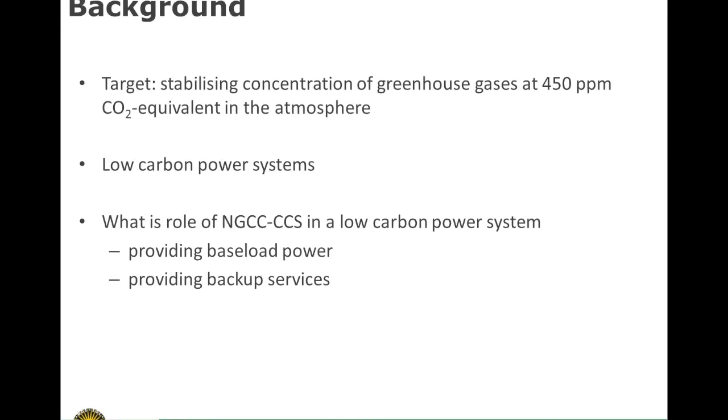We also wanted to know this for gas CCS, especially because gas CCS can play two types of roles. Namely, it can function as a baseload power plant, but it could also provide backup services for renewable energy sources. So our research question was looking at the cost effectiveness of gas CCS in these two types of roles.

In the baseload role, it could compete with different technologies, a wide range ranging from biomass or coal with CCS, geothermal energy. In this research, we focused on intermittent renewable energy sources, which I call IRES in the presentation, because this comparison has not been done a lot. We focus on three IRES technologies: offshore wind, concentrated solar power, and photovoltaic systems.

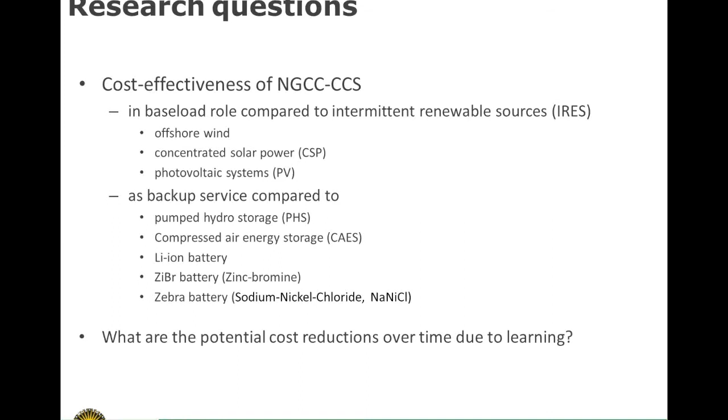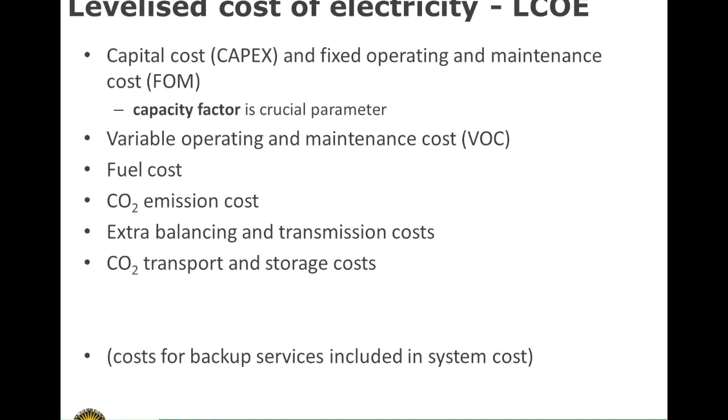We compared levelized cost of electricity, the LCOE, and these are the typical cost components in the LCOE. The contribution of capital cost and fixed operating and maintenance cost depend very much on the capacity factor, how much the technology is used in a year. And then you have the variable operating and maintenance cost, fuel cost, CO2 emission cost, and the extra balancing and transmission cost. And for the CCS, you would also need to include CO2 transport and storage cost. The costs for backup services were included in the system cost analysis. I get back to this.

I first present you our inventory of data. We did a literature review of this data and also contacted different experts. And of course, you find whole ranges of each techno-economic parameter. And we chose some median values to present the base results. These median values were either averages of the input data or could be considered as most representative. We also show results for the whole range between optimistic and pessimistic values. And also note that specific values may be lower or higher in particular regions in Europe. For example, the capacity factor of PV is higher in Spain than in North Europe.

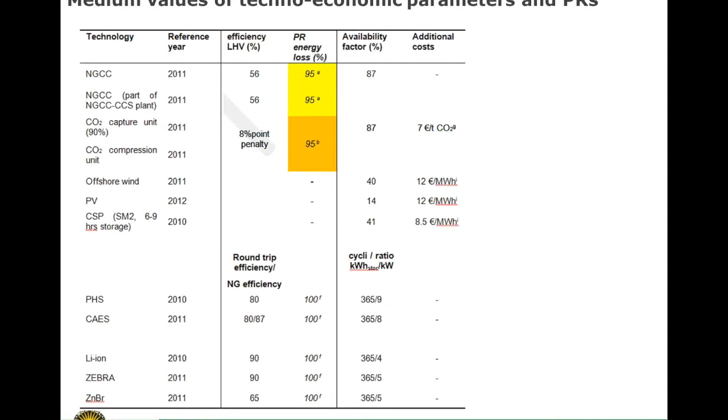These are the other parameters which are important. Of course, the efficiency is of importance, and also for this we have some progress ratio, so that the efficiency can improve over time. Availability factor is an important parameter, the maximum availability of the technology in a year. For gas-fired power plants, we found 87%, so we took this as the base load capacity factor for gas-fired power plants. For the storage technologies, it's important, to find their cost, to assess how much they are used, and for a typical storage technology to provide backup services, it would be around once every day, and then 9 hours discharging.

So with these first data I can present LCOE for 2011 and the different cost components. On the left-hand side you find the power generation technologies, and on the right-hand side the backup technologies. The power generation technologies are also split in base load, the gas CCS plants, and in IRES, which provide intermittent electricity. Gas is of course mainly dependent on the fuel price, which is in this case 7 euros per gigajoule, and the IRES depends mainly on the investment cost and fixed operating and maintenance cost. Their costs are higher, and their uncertainty ranges are also much larger than for the gas-fired ones. This is not only the uncertainty, but also the geographical differentiation.

On the right-hand side you can find the backup technologies, and as a comparison we have gas CCS with a capacity factor of 40%. Pumped hydro storage and compressed air are a bit cheaper, and the batteries are much more expensive and have a huge uncertainty range. Note that in these backup or storage technologies, the cost to charge the storage systems is not included.

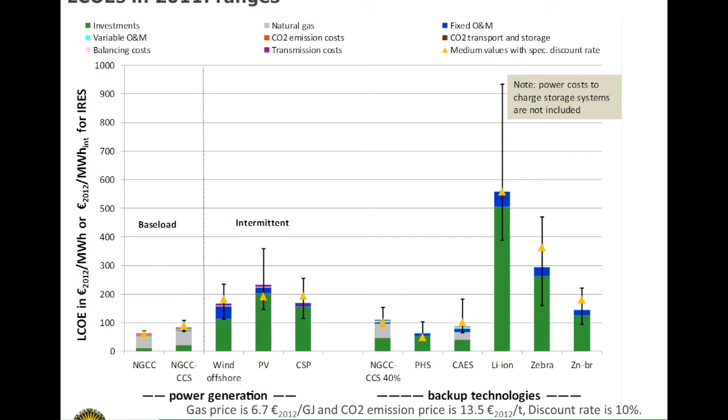Then to assess the maximum reduction, we looked at a few scenarios, and we wanted to look specifically at scenarios in which there was a portfolio to reach the 450 target, so low carbon electricity portfolios. We found 44 scenarios in the Global Energy Assessment Report and 1 scenario in the Energy Technology Perspectives Report of the International Energy Agency. We present the results for 3 scenarios, a bit the extremes: a scenario with a lot of IRES, 1 scenario with a lot of gas CCS, and then a base scenario which is a bit in the middle.

The portfolios, they look like this. Here in the left upper corner is the high renewable scenario, and in this case, the amount of doublings of, for example, PV is 7 times up to year 2050, while in here is the high gas scenario. In this scenario, the amount of doublings of PV is only 3 times.

And here in the left down corner, there's the base scenario. The gas CCS amount of doublings range from 5 doublings up till 2050 to 7 doublings in this high gas CCS scenario.

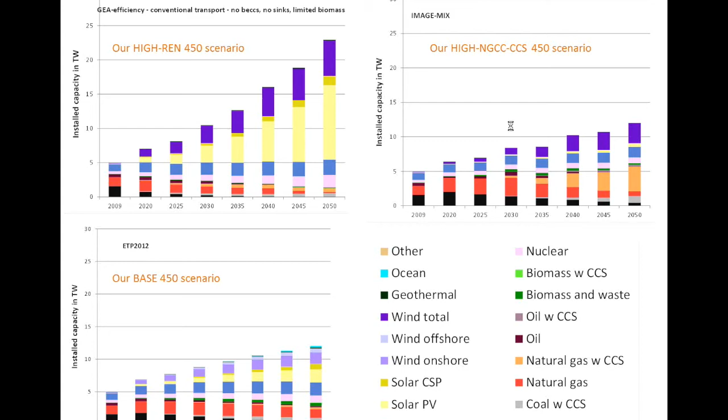With this information, I can present the maximum reduction potential. On the x-axis, I have plotted the cumulative capacity in gigawatts, and then you see the LCOE for the different technologies. First, in black, the gas normal power plant, and here is already a lot of capacity installed. So the amount of doublings is low, and the cost reduction is only 15%.

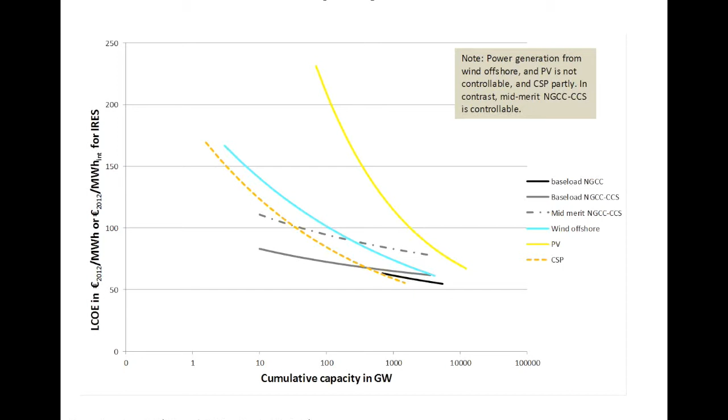I should say that the left point of each line is like the cost in 2011, while the right point is the maximum cost reduction, which could be reached until 2050. The gray line is the gas CCS, which has a maximum cost reduction potential of 30%. And then you have in orange dotted the CSP and in blue offshore wind. They have a reduction potential of 60%, while PV in yellow has a reduction potential of 70%.

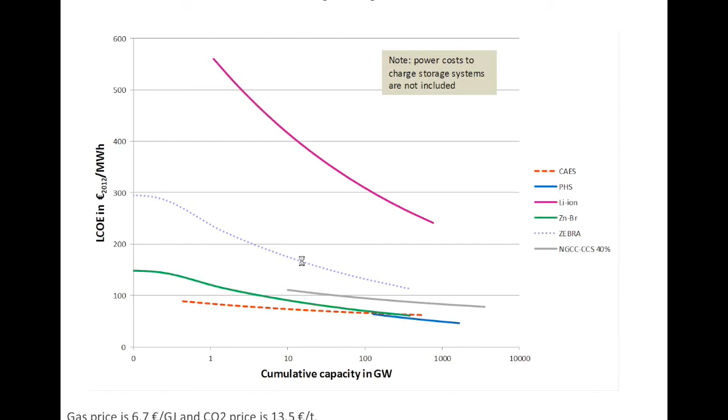So I get to the LCOE over time, and for this you also need to have a development of the gas and CO2 emission price over time. We took these prices from the International Energy Agency 450 scenario, and in this scenario it was assumed that the gas price would go down because there would be less demand in a low carbon scenario. As a sensitivity, we also did a higher gas price scenario.

And then we made many graphs like this for the different scenarios, and also pessimistic and optimistic assumptions of the techno-economic parameters. I just show you one of those, and this is under medium conditions in a base scenario. And you see in the blue line, the normal gas plant cost increases because of the CO2 price development. Gas CCS decreases because of the cost reductions, and they cross over in the year 2025.

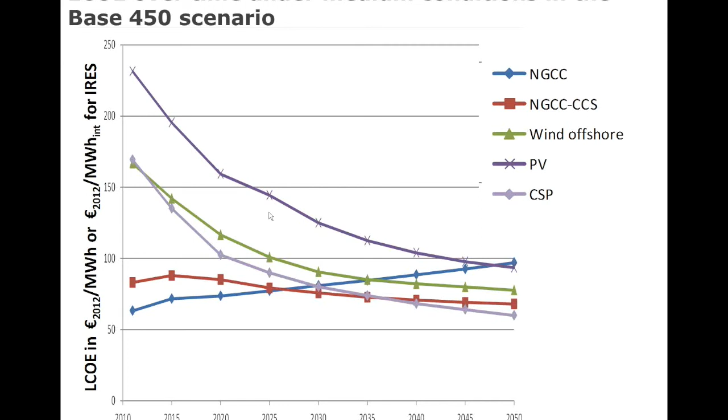The CSP and offshore wind decrease over time, and they get to similar LCOEs in the end of 2050. And finally, PV stays a bit more expensive than those technologies. Well, I didn't show the other graphs for all the different scenarios, but I focus now on the results in 2040. This graph contains all different scenarios and the pessimistic up to optimistic assumptions.

And well, you see a similar graph as in the year 2011, but the error bars are much larger because of additional uncertainty in the progress ratio, as well as in different scenarios there are different amounts of doublings. I want to focus on the differences in the amount of doublings. You see in the yellow diamonds, we have the scenario with the high renewables deployment, and in this case the IRES technologies are cheaper. In a scenario with less deployment of the IRES, the LCOEs are also significantly more expensive. In red, by the way, you see the CO2 emission costs.

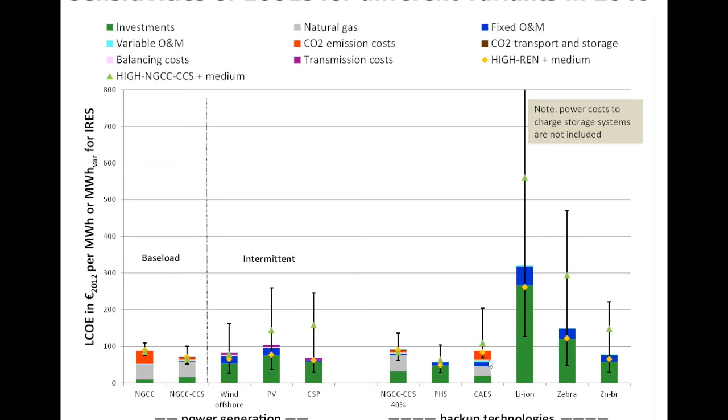Also, with the backup technology, the same applies. When there is more IRES, we expect that there will be more backup technology, so more deployment, and in this case, also the backup technologies will be cheaper. In general, NGCC-CCS and pumped hydro storage are also here cheaper, and compressed air is at the same level but has a more uncertain cost range.

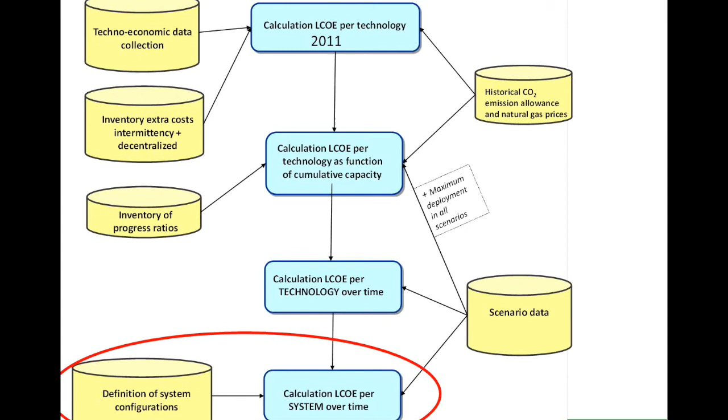And then we've also included the backup services, because up till now only the extra balancing and transmission costs were included in the LCOE. And for this, we designed 4 simple systems. Of course, we realize that the real systems will consist of many technologies, 10 or more. But we think that these simple systems with a few technologies still give a good indication of what would be the cost of having the backup.

We designed 4 systems, one with gas CCS, one with IRES and as backup gas-fired power plants, and then one with IRES and backup gas CCS, and one with energy storage as backup.

The systems look like this. This is the contribution of the different technologies to the electricity demand. In the first system, all electricity would be produced by gas CCS, and its capacity factor would be 58%. And this is lower than the maximum availability because you have to follow a load pattern of the demand. We took a typical load pattern of a North European country.

In the IRES NGCC, there is 50% contribution of the renewables and 50% of the gas-fired power plants, which then has a capacity factor of 33%. And similar for the gas CCS variant. And finally, we have a system, and this is based on a German study, which used detailed power system simulation modeling at an hourly level.

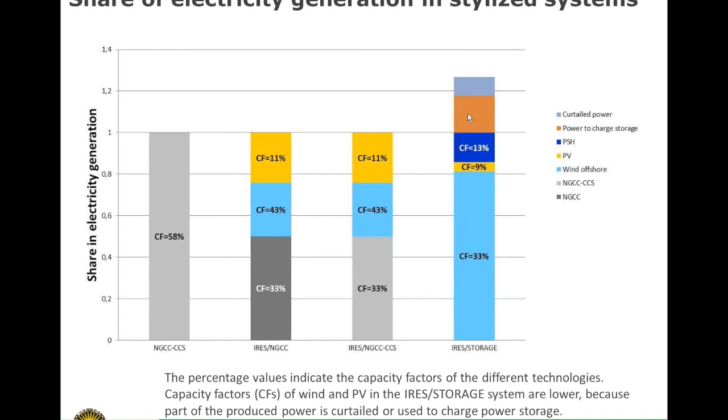This is then the comparison of the system cost, or the LCOE of the whole systems. I want to show you the CO2 emissions of the different systems, and those are in the black diamonds. You see that in the system with the normal gas-fired power plants, the emissions are still quite high, 175 kilograms per megawatt hour, while in the other systems they are always below 50 kilograms per megawatt hour.

Then I focus on the last two bars. Those are the costs in 2040. And you have the system with IRES and gas CCS and the system with IRES and storage. You see that the last one is a bit more expensive. On the other hand, it is based on wind offshore, which is cheaper than the PV. So if the system would have included more PV, the costs would have been higher.

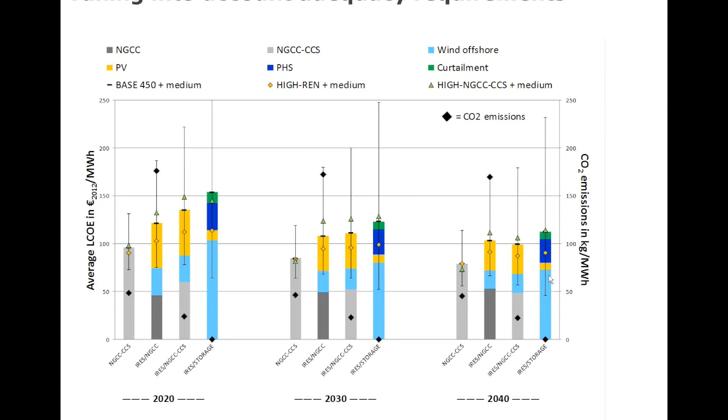Also, it's based on pumped hydro storage, which is not easily available in each country. So if you would have needed more battery storage, then also the cost would have been higher. In all systems, the error bars are quite large, but increasing with increasing IRES and storage.

So that brings me to the last slides. Of course, there were caveats in the study, and we are going to do more research. We especially missed projections on deployment of storage capacity in the different global energy scenarios. All reports said there would be a need of storage capacity, but they did not quantify the amounts or specify which technologies would be used.

It would be required to have more power system simulation models which also model the power storage at an hourly basis. In this study, we did not include demand-side management and the impact on the load pattern. And of course, some techno-economic data are uncertain, especially for the novel technologies like the batteries. And progress ratios were for only a few based on historical time series.

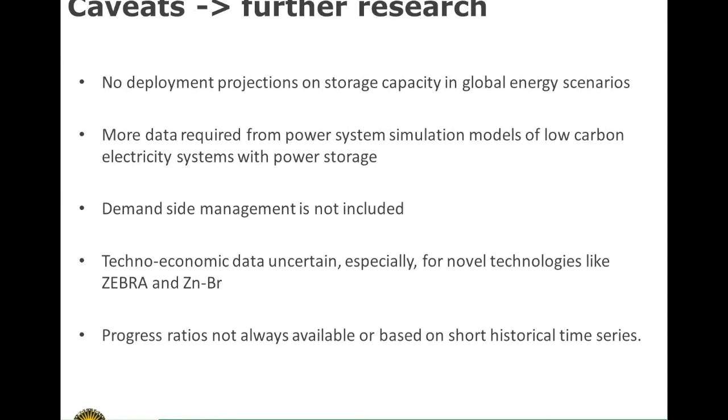With this in mind, we can conclude that the cost of gas CCS as backup is less than the batteries. Note that in these costs the charging costs are not included, and they are less uncertain. Under medium conditions, they are a bit higher than pumped hydro storage and compressed air, and lower than the batteries.

And then finally, the cost of gas CCS as baseload. Again, less reduction than for IRES, because gas CCS, or the gas combined cycle part, is more mature. It is also less uncertain, and then under medium conditions, excluding cost for IRES backup, they are in the same range as offshore wind and CSP and lower than PV.

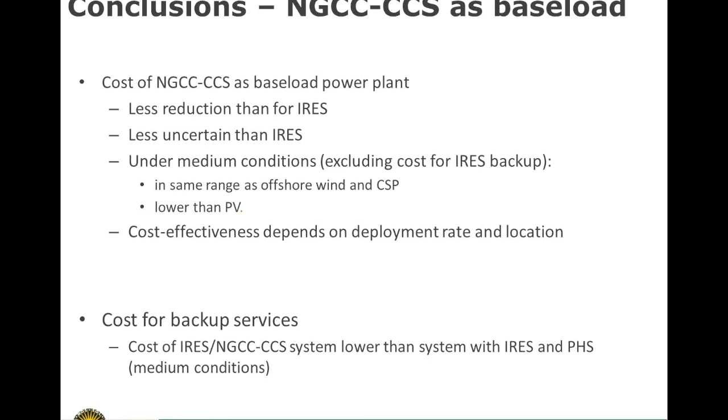We showed also in the graphs that it depends quite a lot on the deployment rate and also on the geographical locations. If we include the cost for backup services, then for a system with gas CCS as backup, the costs are a bit lower than the one with pumped hydro storage. Okay, thank you. This is how I want to conclude my presentation.